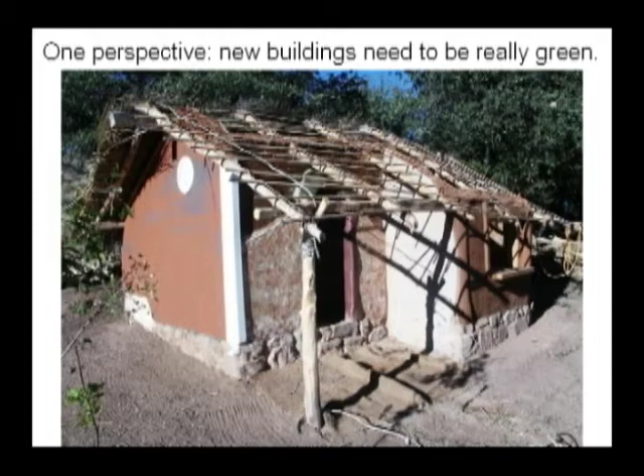Well, one perspective is that really green is a very small footprint, a very organic structure built by the owner of materials found on the site. I don't think this is a sell that's going to work for most Americans.

For some it does. So instead of that, how about we beat the problem over the head with technology? Industry - we have lots of industry. Let's solve the problem with brain power.

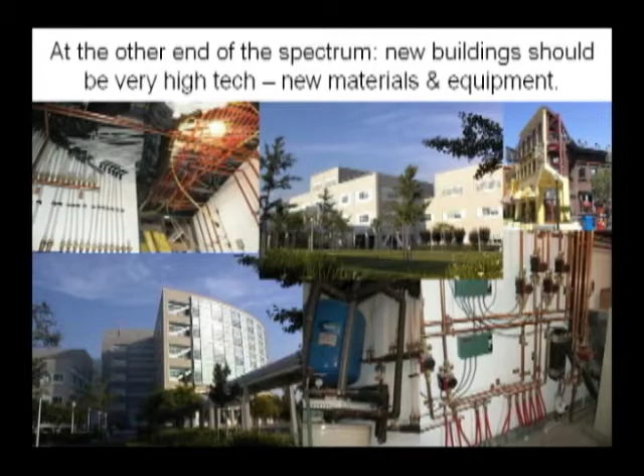New materials, new equipment, new systems. But I think there is a balanced approach. This is my home, and in my home I try to incorporate not only high-tech materials and high-tech energy systems, heating and cooling systems, but I also used straw bale construction, going back to a low-tech construction method in combination with technology, using the better choice when it presents itself.

Balance, the big picture. When I analyze materials or a system or a building, what I'm looking at is these elements primarily: location, material, manufacture, lifespan, use impact, and disposal.

Location, location, location. What's true in real estate is true in the building field. If you can get it locally, if its source is local, if the production is local, if it's warehoused and shipped from a local area, that is a better material than another material.

I won't say it's a green material, because maybe it's not completely green, but there is no green material. There's pluses and minuses for everything.

So here's two examples. Straw. Straw, I guess, is probably for me the most perfect green material that I have used. It's sourced locally, production is minimal, it's a waste product of wheat production. It's usually not warehoused, it's usually just delivered right to the site, and the shipping is minimal, and it's a lightweight material.

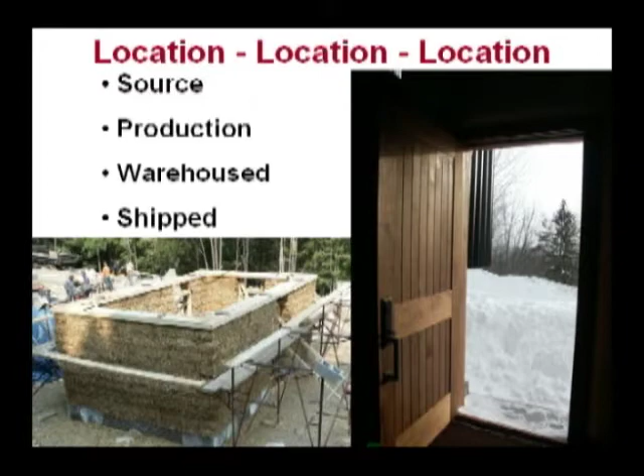Another example is my door. I found a beautiful door from a catalog from a company in Florida. I do not know where the wood was sourced for this door. I loved it, but they couldn't deliver it to me in time. I found a local woodworker who built the door from local lumber, harvested responsibly, and the door is insulated, higher performing, and guess what? It cost less.

Proving that green, what you've heard, is not necessarily true. Green is not always more expensive. Some things are, it's true, and some things are not. But if you look at the whole package, it balances out.

Material. What is the material actually constructed of? Is it a natural material, such as wood? Is it a synthetic material, such as vinyl? Is it a combination, as you might see in a window system? Is it recycled? So here we have a few cases.

The blue stuff there is cotton batt insulation, a natural material, and a recycled material.

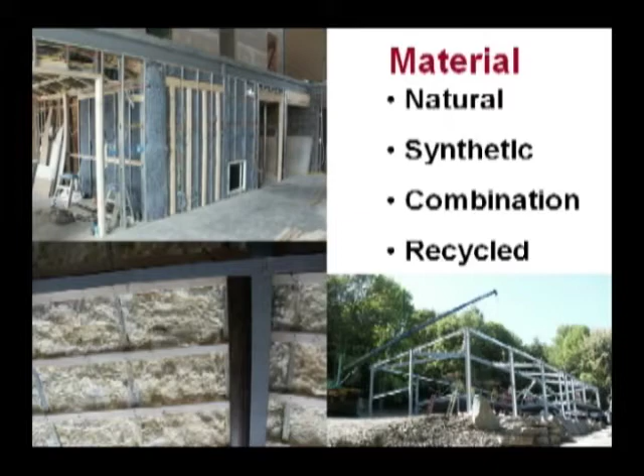Then you'll also see the next picture down from that is also insulation. It's a combination material, made from soybean oil as well as synthetic products. So again, it's a combination. And in this case, the steel is recycled and continually recyclable.

Synthetic. I don't tend to like synthetic materials, like vinyl, but there are some synthetic materials which are very, very eco-friendly, such as recycled polyester carpets, which can be produced in a closed-loop, cradle-to-cradle system, which makes the carpet back into carpet, back into carpet. So in that case, synthetic is good, a high-tech solution is good.

And in the case of natural, some things may be good, some things may not be good. Granite countertops, yeah, they're natural, but they are mined in India or Brazil, shipped to Italy for finishing, shipped to America to be warehoused and finished, and then shipped to your job site. Natural material? Yes. Eco-friendly? I don't think so. So everything has pluses and minuses.

Manufacture. What is the impact of the process of that material? What is the embodied energy in the material, and is it recycled? In the case of the log cabin, we pretty much know what the embodied energy is to grow a tree. Now, is it also harvested responsibly in a forest that's managed?

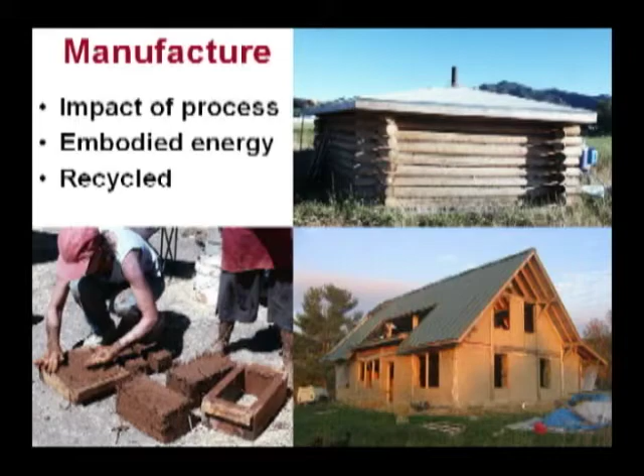Lifespan. What can you expect the lifespan of the product that you're using to be? Is it something that's very long-lasting, high performance? And if it is, can you minimize the replacement and repair of the components? If we're constantly buying materials that wear out, we're not doing much good.

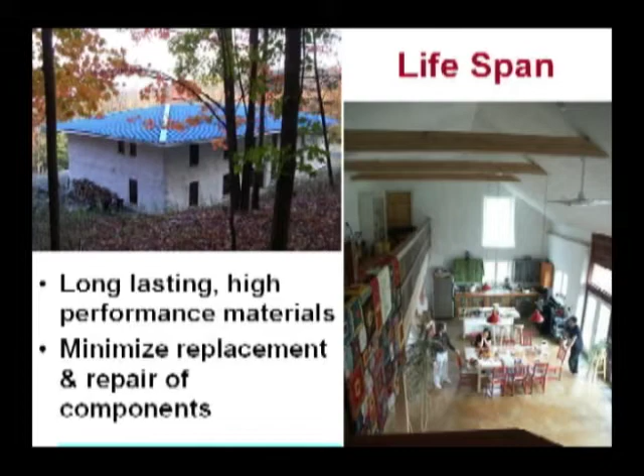So in this case, I'm showing two high embodied energy materials, the steel roof and a concrete floor. But in both cases, these materials will last a significantly longer time than an alternative material would, and so it makes the embodied energy maybe a little more tolerable in that system.

Use impact: what is the energy used? I'm sure we'll hear more of that when we hear from the insulation man. What is the energy used? What is the health and comfort of the occupants? And what are the maintenance constraints?

In the small house you see, it's not made of green materials. It is highly insulated with an energy efficient furnace and has a very small footprint. I would consider this a green building even though it's made of conventional materials, because energy use over the lifespan of the building is actually a much larger cost than the initial structure.

If we get the initial structure right, it's continual savings for years and years. You can also see a passive solar system, another way to reduce energy use. Beside that is a masonry furnace, which stores energy in the mass in the same way that solar works, storing the heat and then radiating it out.

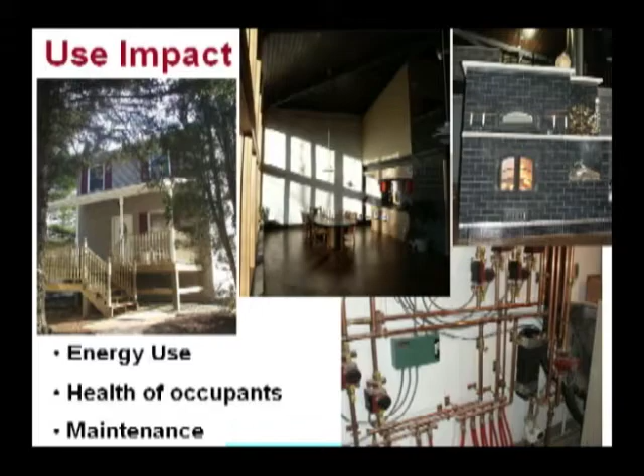Finally, there's a partial slide of part of my geothermal system. That takes the energy from the sun that soaks into the ground, keeping the earth at a constant temperature at a depth in this location of about 5.5 feet. The energy from that powers the heating and cooling loads for the house.

The combination of geothermal, passive solar, and the masonry furnace, I discovered this winter, is a very good combination in a straw bale, well-insulated house. Our heating system went out for about 10 days, and the drop in temperature after 10 days was only 3 degrees. That's when we first noticed it wasn't working. It took another week for the repairman to arrive, with another drop of 1 to 2 degrees. That's a pretty functioning system—and that was in January.

So a total system can be very green, but you've got to think of all the components working in combination with each other.

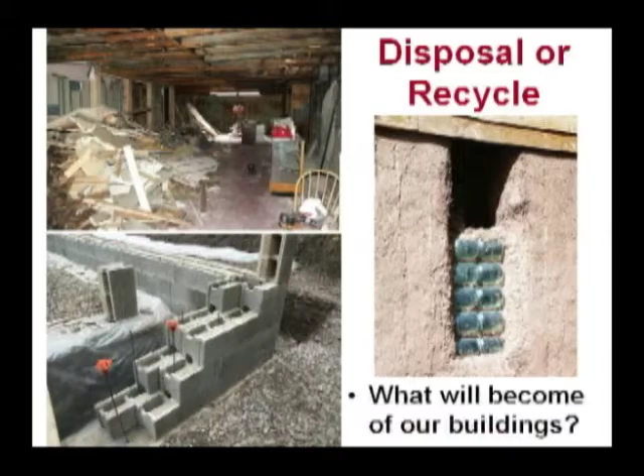We also need to look at how we can deconstruct buildings, especially our old buildings which have beautiful features, and reuse them directly into our houses. The last picture shows an innovative, direct use of an item into a building—the most simple recycling you can do.

So in general, we want to reduce the use of extra materials and products. We want to use long-lasting materials: recycled, reclaimed, regional, or American-made products and materials. In these two examples...

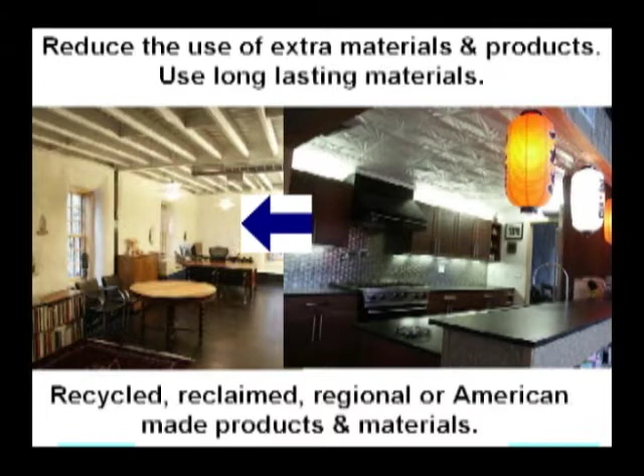On that side, there is no ceiling, so there's no materials and no labor to build one—do you really need a ceiling? And on the floor, a concrete floor: you pour the concrete slab and you're done. No carpet, no installing, no trim, no labor, no extra cost. Green can be cost saving.

In the other slide, the kitchen slide, the tin ceiling is actually reclaimed from an old building. The fixtures and appliances are American made. The countertop is made of compressed paper, 100% recycled. And the structure surrounding the kitchen is made from sunflower seeds pressed into a board.

There's lots of these materials being made in America, very innovative, and you've got to do a little digging to find them because many of them are not manufactured by the biggies. You have to do some research on your own—they are not appearing in national magazines.

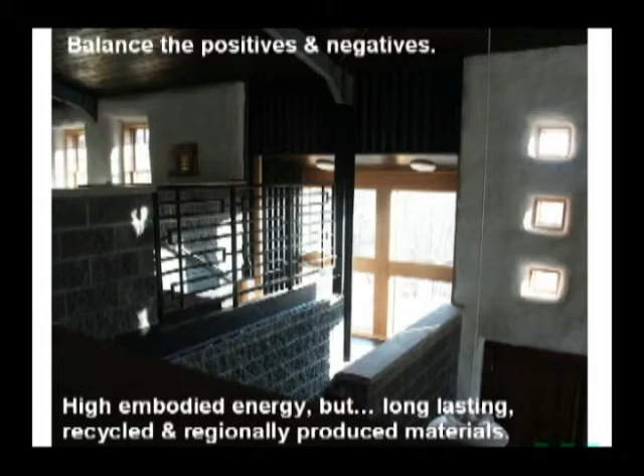So in closing, we have to balance the positives and negatives. I like this slide very much because it shows the contrast well between steel and concrete block—high embodied energy—versus the very low embodied energy of the wall system, and also fluorescent lights. All of these products are regional or local, and that also supports the economy and jobs in our area.

Here are some of the organizations that Jim mentioned, and I have some disagreements with on LEED and how well that is working. I think these are minimum standards—a good starting point, but we need to find solutions beyond what they are allowing for. LEED doesn't allow a lot of points for things like straw bale building. There are other types of buildings and systems that would work great for being more green, but they're not recognized by these organizations.

Take the information from them, jump off, and go beyond. Let's go build green now. Thank you.

Hi, good morning. I'm Madeleine Cotts, and as Jim said, I'm a landscape architect, and I also have to make a confession, which is that I'm a LEED certified professional.

And I agree that LEED is just a start. The other thing about LEED that a lot of people don't realize is you don't have to be a LEED certified building to be a green building. LEED is a system of verifying and doing a lot of paperwork to make sure you've incorporated a lot of the green things you said you're going to do in the project, but it can add expense just to do all that paperwork. So sometimes people or organizations decide not to go for LEED certification, and yet their building is very green, at least as green as a LEED silver or gold building. It's just a question of whether you're going to go through all that paperwork and get it actually certified.

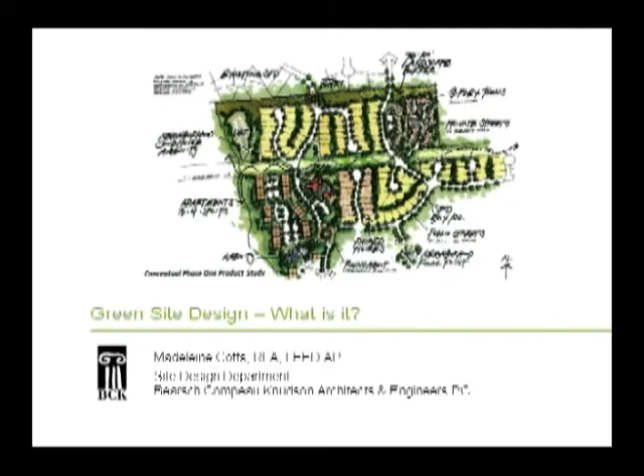What I do is site design. A lot of people don't understand landscape architecture. If they've thought of it at all, they tend to think of it as planting design. But the bulk of what we do is site design, which is the design of everything that's outside the building: the setting for the building, the utilities coming to the building, the access and exits, the vehicular and pedestrian circulation, how you shape the ground, and the grading and drainage. All that is site design.

I decided today I wasn't going to talk a lot about traditional site design and what we need to do differently. I have a feeling a lot of us here are fairly well educated about sustainability and green design, and we already know a lot of the bad things that are happening. What I'd like to tell you about to start is some better ways to do things.

What we might call greener site design—I don't really want to call it green site design yet because it's something that's evolving. I have a feeling in 20 years we'll look back and say, oh my gosh, the things we were doing, now we realize we should be doing them a different way. So green or greener site design means trying to minimize the environmental impacts of whatever development we're doing on the site, keeping as much of the natural system still working as possible, while yet supporting human life and purposes and needs.

Some of the organizations involved in codifying a system of greener site design right now are the U.S. Green Building Council—there's a preliminary LEED rating system out for neighborhood development, which has a lot to do with site design. Better Site Design is a paper that the New York State Department of Environmental Conservation has come out with, listing a system of practices for developing sites in a greener way. Also, the Center for Watershed Protection is a really good source of information on better site design. Their website is cwp.org, and they have lots of free information.

So the start of green site design really is in your site selection. Ideally, you look for an already developed site, like the Psych Center, that could be redeveloped for your new purpose—that's recycling already developed sites. If you can't find something like that, look for an infill site, an empty lot, or an underused area in an already developed area before you head out and develop a completely green virgin site. Only go to a greenfield site if you really can't find anything else to fulfill the need.

So ideally you're going to look for a site, even if it's an undeveloped site, that's near existing infrastructure, so that you're not extending utilities a long way and sprawling out into the undeveloped countryside. It's better to be close in, where it can be within walking distance or possibly biking distance of existing services and stores, shops, employment, maybe public transportation.

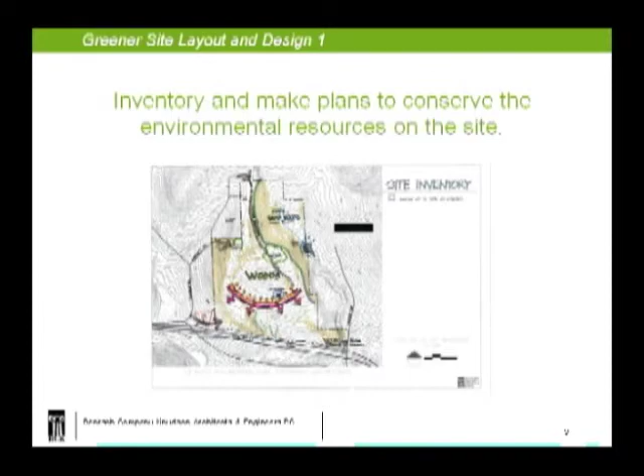Once you've picked your site, you need to take a look at it and see what's really there. Inventory it and look for the natural systems on the site, the more sensitive environmental areas like steep slopes or wetlands, and create a plan that guides development, where you've created a buffer zone around a wetland or pond, and thought about microclimate and where to place buildings for solar energy or protection from the wind. So think about the natural systems on the site first.

Then you're going to place the buildings and the activity areas and the developed areas so that they have the least impact on those more sensitive areas.

This particular drawing, I didn't do this. This is from a project that came before the Vestal Planning Board, and I am an alternate member on the Vestal Planning Board and was happy to see this. I should give credit — this was a project of McGowan Builders, and they gave me permission to use this sketch. They want to develop an area for housing, and part of their site is very steep and wooded. That's the green area on the left. They said, we're going to preserve that. It's going to be an amenity for the neighborhood. There'll be some trails on it, but nothing else, and we'll save that as a natural area, which is obviously more than two-thirds of the site.

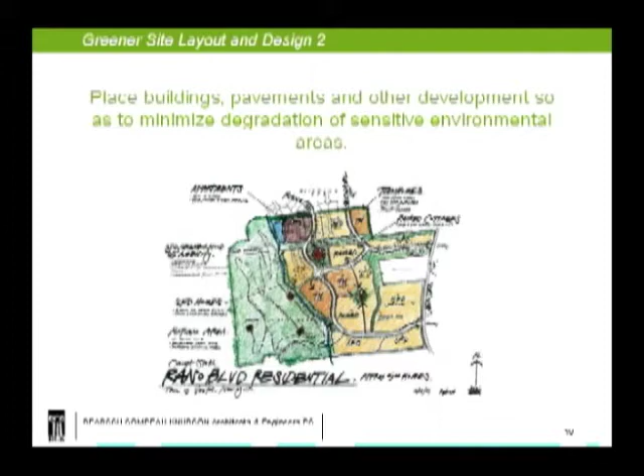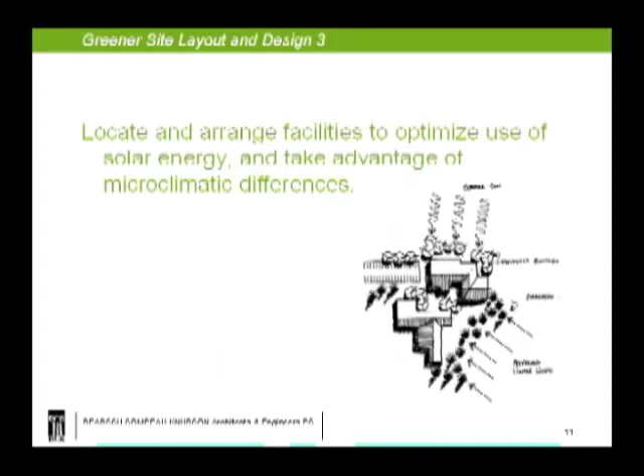Again, place the buildings in such a way that you can take advantage of any microclimatic differences on the site — face southeast for best solar insolation, and get some shelter from the winter winds if possible, which tend to come strongly from the northwest.

We want to minimize the area of pavements. Pavements are bad for all kinds of reasons. Even though they're necessary, they prevent infiltration of rainfall into the ground. Water runs off very fast, causes flooding, causes more erosion, and you can't grow any plants. They won't breathe and capture carbon like a green area.

So we want to minimize. One of the most important principles of site design is minimizing the impervious surfaces constructed, minimizing the area of the site that you're altering from its natural state, and then, as Laura talked about a lot, minimize the energy needed both to build it and to live in it afterwards.

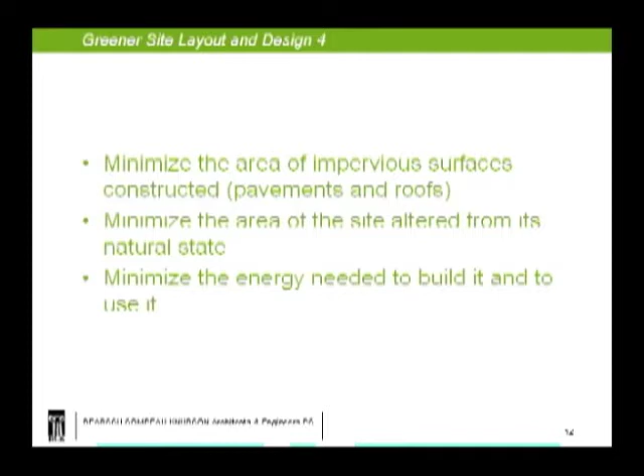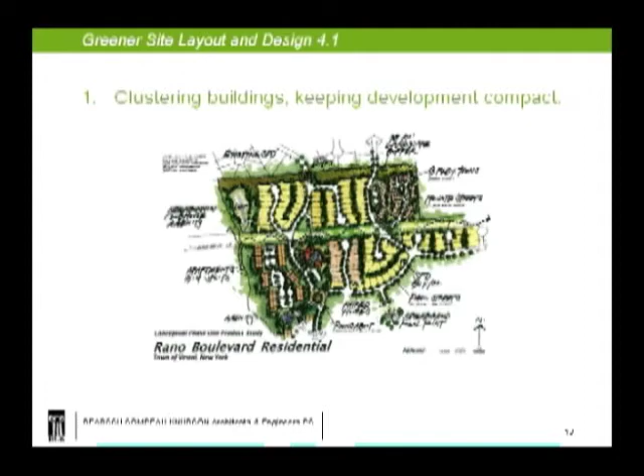One way to do that is to cluster the buildings. Keep your development compact — that leaves more areas that are green and untouched. It shortens the length of utilities and drives and all those kinds of things. And that's a basic principle which is not really well accepted, especially in residential development, where everybody wants their house in the middle of their little lot and a little strip and then the next house. So cluster development is a big thing that we're hoping to move towards more and more.

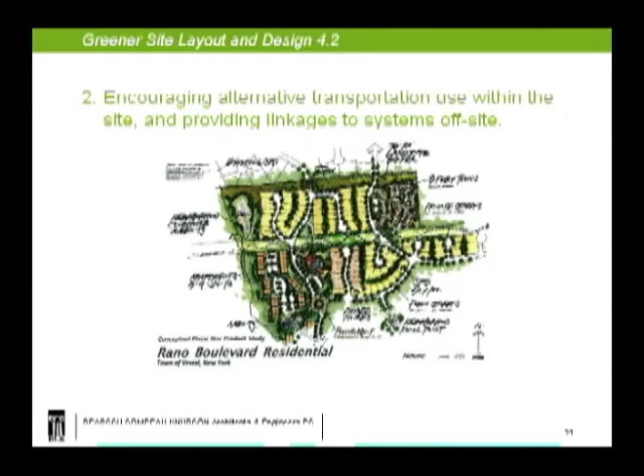Also encourage alternative transportation use within the site — that means trails and bike trails within the site. There's a green spine in this project with the trail system linking the different neighborhoods. And then you also need to respond to the transportation systems and any trails, and opportunities to get onto public transportation that are outside the site. So you need to think beyond the site that you're developing.

Also allow some public green spaces that could possibly be used for local food production and community gardens, and don't make that dependent on the individual homeowner, but encourage it on a development-wide basis.

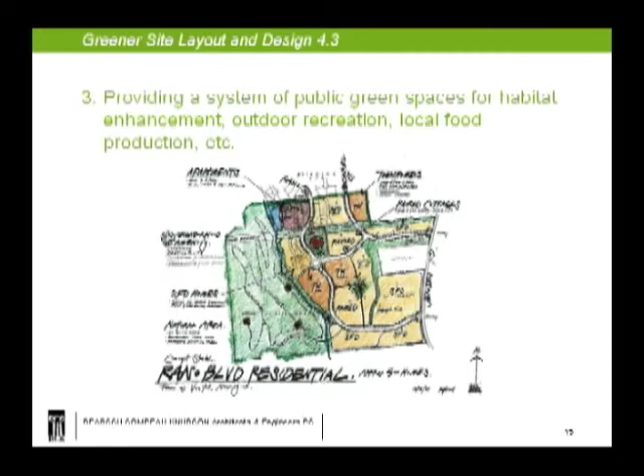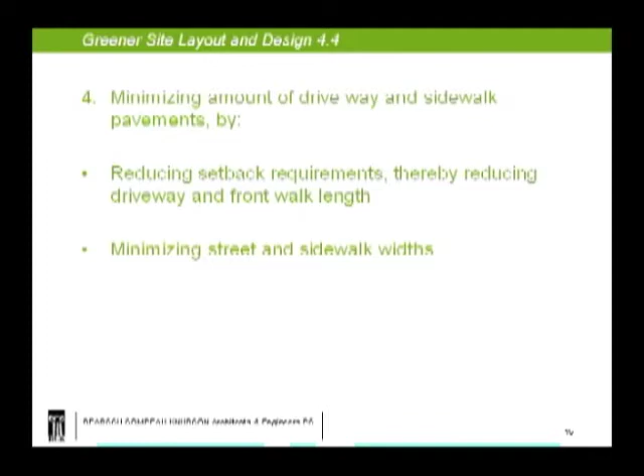The other way to minimize driveway and sidewalk pavements, besides keeping the development close together, is reduce driveway lengths. In some communities it's mandated by a setback requirement, how far the house has to be set back from the street. Many of those requirements are greater than they need to be, and if you can reduce that, it shortens your driveway and front walk, and also make them as narrow as you possibly can. That's another thing often mandated by the community, and something that may need to change to allow it, but most of our streets and sidewalks are wider than they need to be. All those additional square feet of pavement cost money to build, cover over green area, and promote stormwater runoff and flooding.

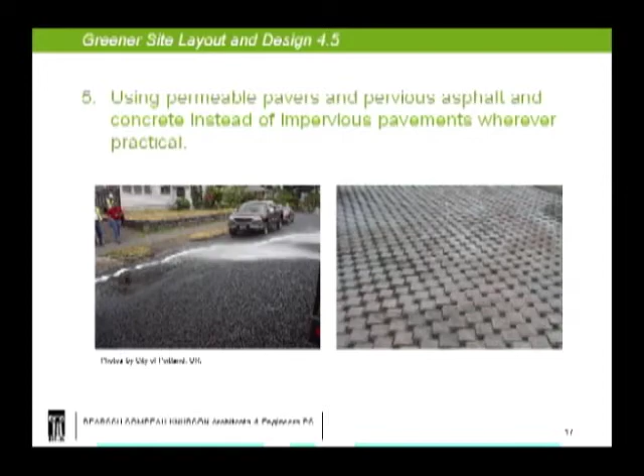There are some alternatives to all that concrete and asphalt that are more pervious, meaning they let water soak through. There are new kinds of pervious concrete and asphalt. That picture on the left shows water soaking into a street in Portland, Oregon. There are also permeable pavers, where the pavers have a gap filled with free-draining stone, allowing water to drain through. These items, especially the pavers, are being looked at more for use in our area.

There are some questions and doubts about pervious pavement and how it reacts in freeze-thaw. People are nervous about that, but we know that permeable pavers with gaps work very well in our climate.

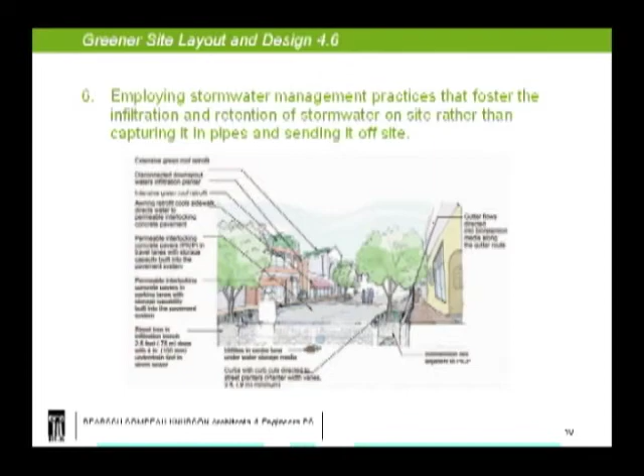There are a lot of new stormwater management practices that involve creative ways of letting stormwater soak in on the site instead of piping it away quickly and causing problems downstream. You've probably heard of green roofs, planted roofs. Those help absorb water, since a roof is otherwise an impermeable surface.

Reservoirs of gravel underneath permeable pavers on the street allow water to soak in and be held under the surface, given time to soak into the surrounding groundwater. In the future, especially in drier areas, there's not only the problem of excessive surface runoff, but also increasing problems with sending our water away rather than keeping it locally to recharge the aquifers that give us drinking water.

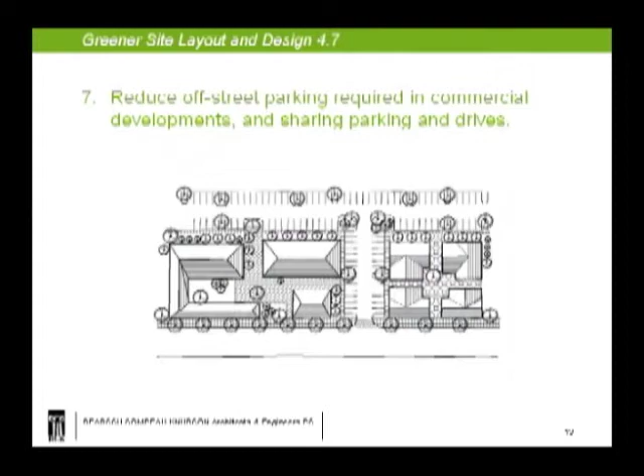We can reduce off-street parking. Many municipal codes require enough parking for everybody on Christmas Eve doing last-minute shopping, and the rest of the year the parking lot is two-thirds empty. Encouraging more shared parking between adjacent commercial properties, and sharing driveways so everyone doesn't need to drive back into their own lot, are additional things that help cut down on pavement.

Look at your exterior lighting. Don't provide more than you need to. Not only does it cost money and energy, but it creates light pollution and sky glow. So those are some things you do when building the actual pavements and facilities.

When you're planting the project, you can use green landscape design principles to restore habitat that was either damaged before you got to the site, or damaged during construction. We need to use more native plantings in our landscape designs, because native plants evolved to support the entire ecosystem—they're the foundation of it.

Native plants bloom at the times pollinators are ready to seek nectar, and create the size of seed that local birds are adapted to eat—they're all part of the ecosystem. Native plantings are becoming a really hot topic in landscape architecture, and a lot more plants are available now than there used to be.

Another problem that creates compaction and damages nature is construction activity itself. It's something we're working on, raising awareness with contractors that heavy equipment has long-term effects damaging soil structure, especially in our clay soils, where for many years afterward the soil won't support plant growth or allow water infiltration once it's been compacted repeatedly.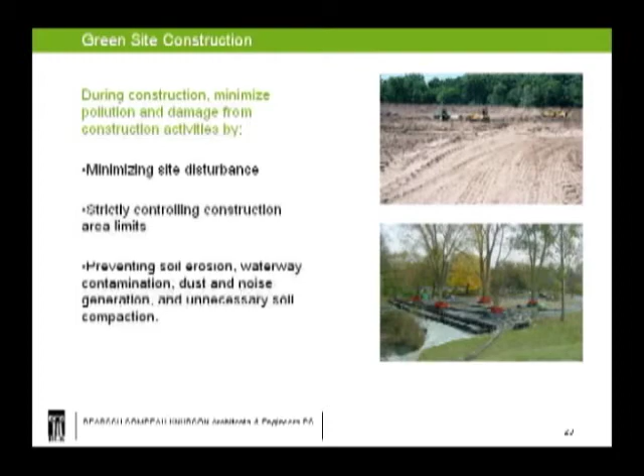It makes it difficult for contractors if you tighten the space they need to work in, but it's something we're moving toward—limiting how much of the site is driven on or used for material storage during construction, and developing techniques to ameliorate compaction afterward. These two slides show a typical construction site where equipment drives everywhere, versus one using erosion and sedimentation control practices so the site doesn't end up looking like a moonscape.

You can go to, I guess my presentation will be on the Binghamton Sustainability website, so you can look at those later. But these savings come from basically building less pavement, clearing and grading less of the site, managing less stormwater runoff, and requiring smaller practices to manage that runoff after the project.

You're building fewer linear feet of curb and gutter because we're not sending all the water into a pipe and off-site. We're directing it to some kind of infiltration or bioretention area on the site, and you don't want a curb blocking that flow off the pavement. And you have shorter distances of utilities and piping if you're clustering development. So that's where the savings come from.

It's not all savings, because a lot of these practices are new. When contractors bid on a job, they'll add some extra because they're not sure how long it'll take them, since they haven't done it that often before. Some of the materials aren't as readily available because they haven't been as widely used. I think those are costs that will go down with time, but right now permeable pavements cost more, and some of the new stormwater practices cost more, both to design and to build.

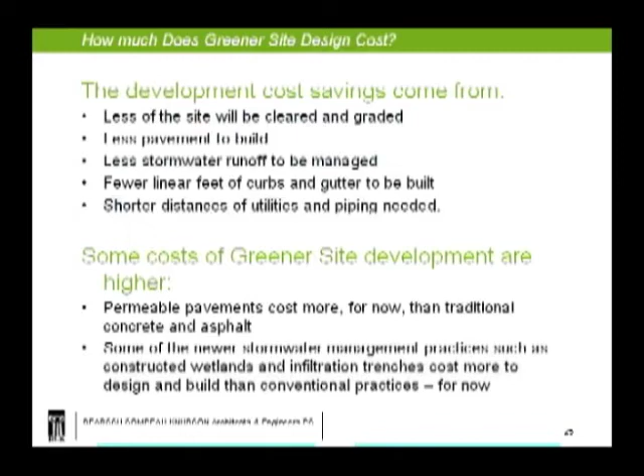So what's it going to take to make green site design a more normal practice? I went to college 30 years ago, and many of these things were being talked about in my classes. Now we're finally getting to where I get to employ some of them. In some ways it's incredibly disheartening, and in some ways it's actually heartening, because at least we're finally getting there. And certainly with everything that's been happening in public awareness and gas prices, it looks like we're going to get there a little faster than it seemed like we were.

But there are some existing impediments out there. I alluded to some earlier. One is municipal ordinances. A lot of our existing codes actually prevent the adoption of some of these principles, things like requiring street widths that you could land a jumbo jet on. We don't need that. People feel somehow that wider streets are safer, but a lot of studies have shown that they're actually less safe because they encourage people to drive faster.

Another issue, I showed you this McGowan project for Vestal. That project's been hung up for quite a while because there's no good provision in the Vestal code for cluster development. So you have a contractor or developer willing to try something new that's a little greener, but he's being blocked because it takes a long time to get a code change. So we need to look at our local codes and make some changes.

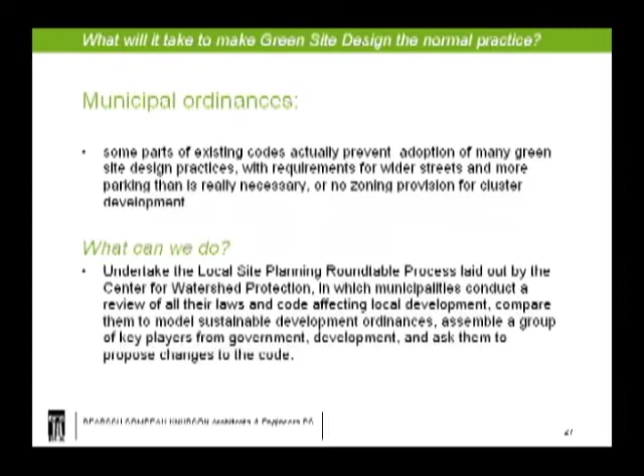And I've been encouraged by looking at the Center for Watershed Protection, which has put together a procedure for local governments to undertake this kind of comprehensive development code review. I hope that we'll have some municipalities around here undertaking that and taking the lead for others to see that we can update our codes and allow and encourage more green development.

Some blockages there also exist among municipal officials. It's just normal that new things come along and you're supposed to review and approve them, but you're not familiar with it and don't feel comfortable necessarily making a decision and approving a plan that's using some unfamiliar techniques. So it would be nice if we could encourage our towns to hire outside professionals on an hourly basis to review and give comments on plans that are a little more unfamiliar than things they're used to seeing, and to encourage our town officials to get continuing education on new and more desirable types of development.

I know from my own experience that it's important to not just get the planning board educated, but also the town officials that appoint the planning board and are ultimately responsible for everything that does get passed by the planning board. And make your municipality aware that there's a constituency out there for green design and smart growth, that you would like to see these things happen.

And as always, everything goes better with a little bit of sugar. If we can talk more about how great the town could be and how wonderful these new practices are, as opposed to talking about how terrible everything is, it often goes over a little bit better.